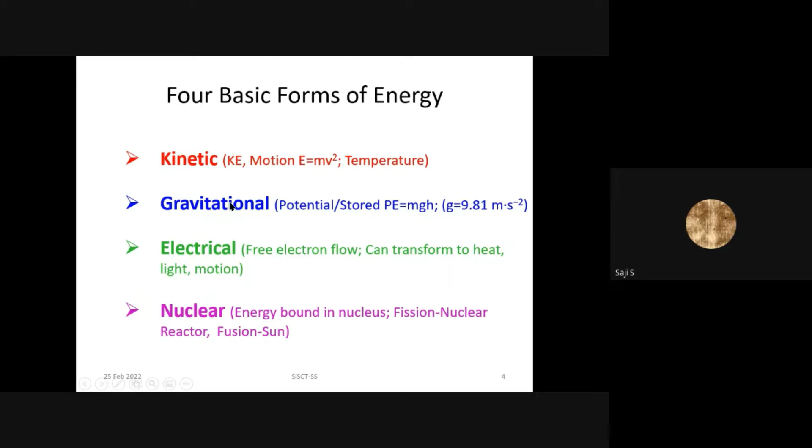So basically, we are looking at 4 types of basic forms of energy. And out of this, the major classifications are two: non-renewable energy source and renewable energy source. The non-renewable energy source is exhaustible, meaning it is finite, and is polluting, and the byproducts are also difficult to handle. Typical examples are coal-based, petroleum, nuclear, and gas-based sources. These are non-renewable energy sources. Now, renewable energy sources are regenerative, meaning they can be regenerated. They are non-depleting, they don't deplete. They are environmentally benign, which means it's a low carbon technology and very safe to use, because the handling of byproducts is very minimal here. So there are many examples of this.

One is solar photovoltaics, which is a direct conversion of sunlight to electricity. You have solar thermal, where the sun's rays are used to heat up a medium like water, thermal conversion. Wind, of course, is due to pressure variations in the atmosphere, and biomass. Geothermal is the latent heat, intrinsic heat in the Earth's crust, which can be tapped by injecting water into the depth of the Earth and taking out the hot water or steam. We have tidal waves because of the gravitational pull of the moon. We have waves because of variations in temperature and wind patterns. Of course, for hydro we consider only small hydro as a renewable source.

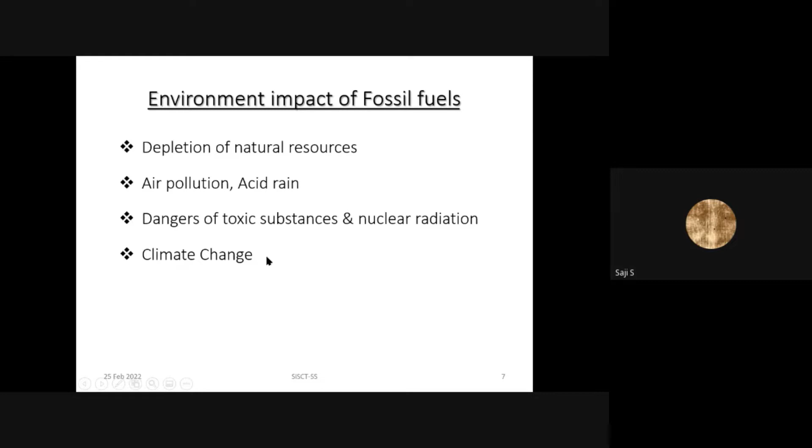And finally, climate change. Climate change is something I'll go into more detail on, because it's an interesting topic. Now we have a term known as greenhouse effect. It's a very natural process. There is nothing abnormal about it. It's a process by which the Earth's temperature is balanced by the atmosphere.

There's a natural layer of carbon dioxide and water vapor in the atmosphere, a natural background level, which prevents the heat of the earth from going out. The sun's radiation comes incident on the earth, the Earth gets heated up, and re-irradiates some of this heat backwards into the atmosphere, but this layer protects or prevents much of the heat from going out.

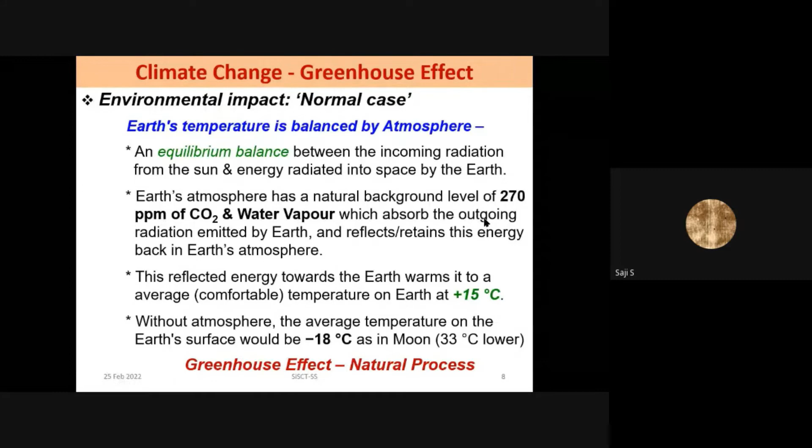The result is that Earth is maintained at a very comfortable temperature of about 15 degrees centigrade. This is the average temperature of the Earth. If this level of CO2 and water vapor were not there, the average temperature would be like that of the moon, where it is minus 18 degrees centigrade. So this is a natural process - greenhouse effect is a natural process by which carbon dioxide and water vapor prevents the Earth from getting too cold. It's maintained at a very comfortable temperature.

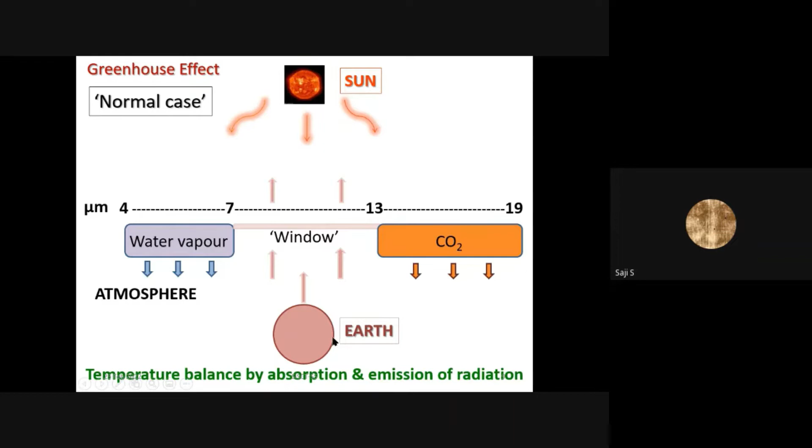Now alternatively, if there are a lot of greenhouse gases like methane, ozone, carbon dioxide etc., they block the outgoing heat from the Earth, so it is reflected back to the Earth, and this causes an increase in temperature of the Earth. Greenhouse gases originate from fossil fuels, burning agricultural waste, chlorofluorocarbons (like refrigerants), and so on. So excessive production of greenhouse gases can cause this temperature retention in Earth.

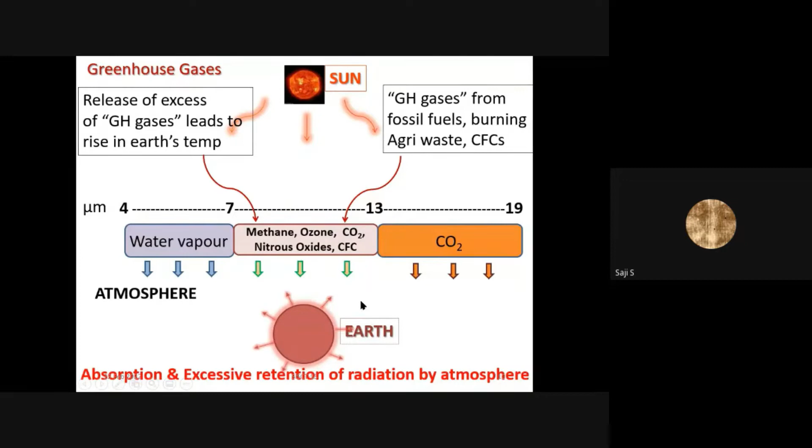Carbon dioxide is one of the major contributors, which is a byproduct of burning fossil fuels. Methane gas is from agricultural activities. Nitrous oxide is from agricultural activities and fertilizer uses. And fluorinated gases are also a contributor. So all these are majorly produced by fossil fuels and industrial processes.

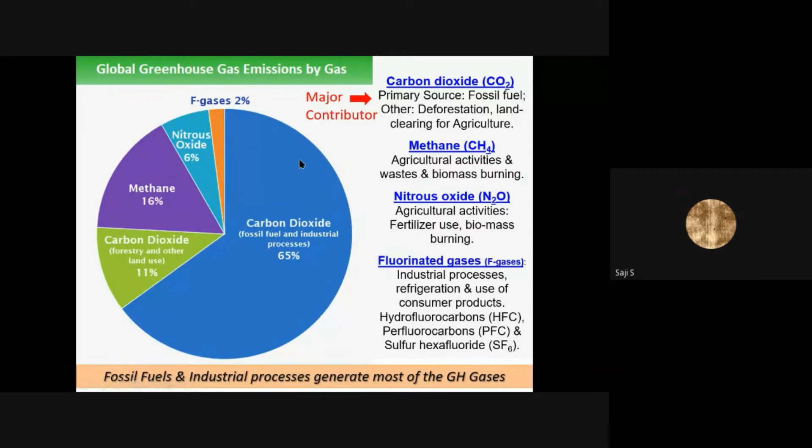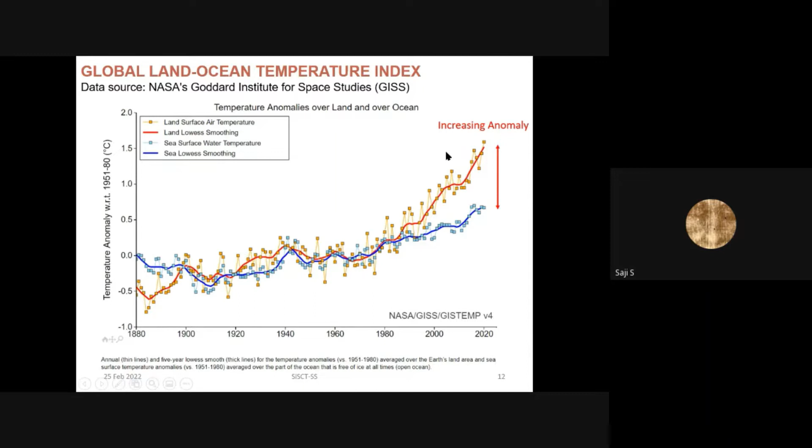The net effect is a temperature difference between the surface water temperature and that of the land. This is becoming an anomaly now, and the gap is increasing, which means there's a heating up of the Earth over a period of time by about 1.5 to 2 degrees centigrade. It's very small, but the effect is visible, it is discernible. This is known as climate change, and it gives rise to abnormal floods, high temperatures, heavy tornadoes, or whatever. Any changes in geographical patterns could be due to such increase in temperature.

Now we also look at what is carbon footprint. The carbon footprint is defined in terms of global warming potential in units of gram carbon dioxide equivalent per kilowatt-hour, per unit of electricity that is produced. It is known as global warming potential, and this is documented for different energy technologies.

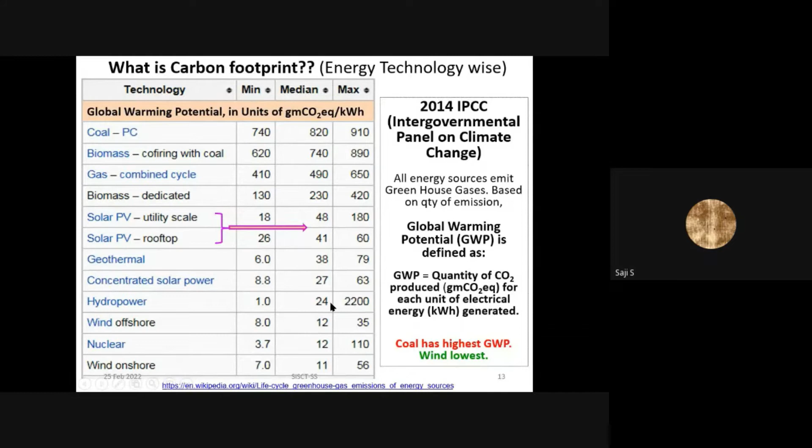For coal it is the highest, 820 gram carbon dioxide equivalent per unit of electricity produced, whereas for wind it is the lowest, at 11. Photovoltaics or solar energy is somewhere in between, quite less, at 41 and 48. So the global warming potential index is highest for coal and lowest for wind, and this value can be used to calculate the amount of carbon dioxide that's produced.

So in our normal lives, we come across many of these energy materials like electricity. Suppose we use 150 units of electricity per month - it gives rise to about 1.5 tons of carbon dioxide every year.

This is obtained from certain standard emission factors. If you use petrol, 15 liters of petrol gives a carbon dioxide output of about 0.413 tons. Diesel is about 0.318, and liquid petroleum gas, our cooking gas, is about 0.25 tons. The lowest comes when we use solar energy for electricity generation, only about 0.053, almost one order of magnitude less than liquid petroleum gas, diesel, or petrol. So this is the advantage, a low carbon footprint for solar energy.

So the basic driver, the key driver for renewable energy, is to switch and utilize low carbon technology sources, renewables. So this is our motivation.

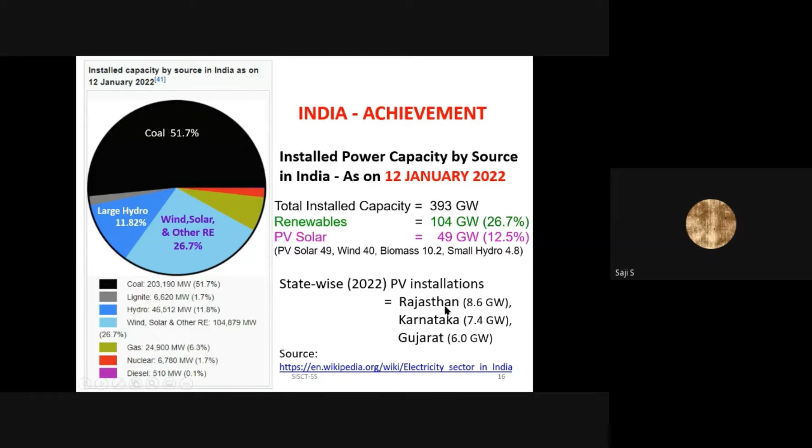In India, as of 12th January 2022, out of a total installed capacity of all energy sources of 393 gigawatts, 104 has been from renewables. Renewables means wind, solar, and mostly wind and solar, but of course small hydro; geothermal is not present in the country. Small hydro and biomass together account for about 26% of the total installed capacity. PV solar, at 49 gigawatts installed capacity, is about 12.5%. It's not very large, but it is significantly large, about 12% of the total installed power capacity in the country is from solar. The leading states are Rajasthan, Karnataka, and Gujarat.

Now we'll look at solar energy briefly before we go into the technology. Sunlight is a very elegant source of energy, providing heat and light. It is abundant, universal, and distributed. It's sustainable, meaning it will last for the next generation also; we cannot entirely use it up, there's plenty for the next generation also. It's a low carbon technology, as we have just seen, and very benign. It's possible to directly convert sunlight to electricity by photovoltaics.

This is the technology we are going to look at, and it was enabled by the semiconductor revolution that has taken place in the world, basically silicon chips used in electronics. It's the basic PN junction technology used in photovoltaics, and there's a high compound annual growth rate for photovoltaics, almost 35%, which is significantly large.

It's easy to see that the amount of solar energy reaching the Earth in one year is almost double that of all non-renewable energy sources combined: coal, oil, natural gas, and uranium in the Earth. So there is plenty of energy reaching the Earth, and it can be tapped.

The sun is a very hot sphere of gas, and as said before, there's a nuclear reaction taking place inside. The temperature in the core is about 20 million degrees Kelvin, and the outside surface temperature is 6,000 degree Kelvin, also very large. The total power emitted by the sun is about 9.5 times 10 to the power 25 watts, again very large. The sun is, of course, a source of light, heat, wind, rain, vegetation, and life. So basically we have a single source, a non-depleting and excellent energy-producing source.

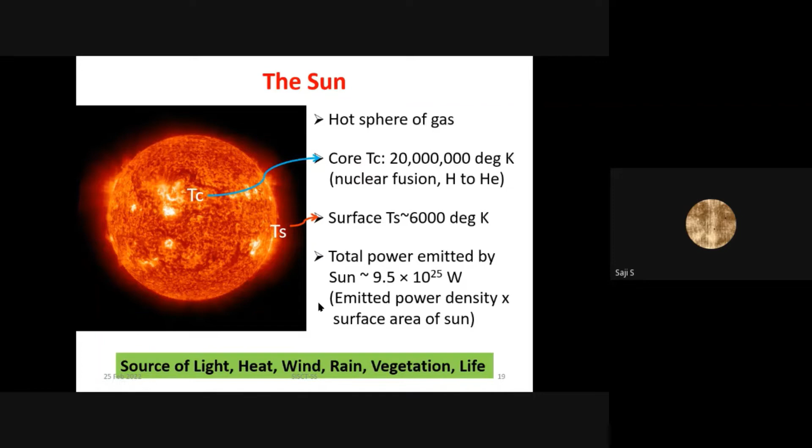Now the sun's energy comes to us in the form of a single white or yellow light to our eyes, but actually it contains different wavelengths. As science students, you will be able to see that there are different wavelengths; we call this the visible part of the spectrum. The electromagnetic spectrum extends from radio waves to gamma rays, and visible falls somewhere in the middle. If you pass the sun's rays through a glass prism or through water drops, you can see a number of split wavelengths. So we are going to use only these visible wavelengths.

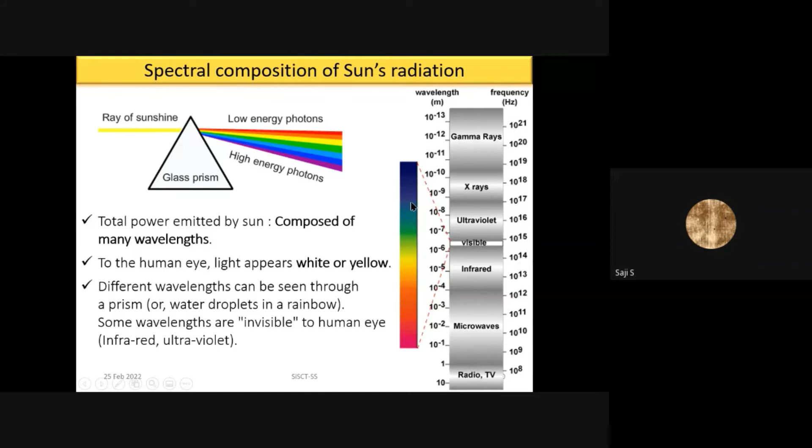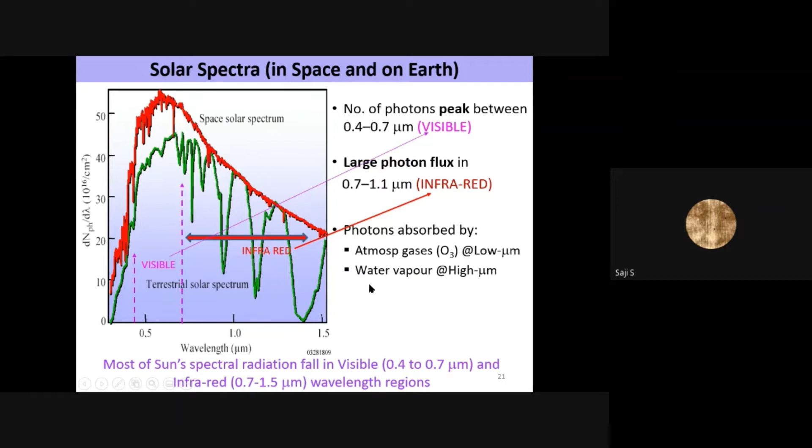We are going to find a material by which we will be able to use this. What reaches the Earth's surface and what is in space are slightly different, because the visible rays peak at about 0.5 microns, but there is also a large amount of infrared rays available in the sun's spectrum. What is in space is different from what is coming to the Earth, because there is a lot of absorption taking place in the atmosphere from ozone, water vapor, and so on. So what is really reaching the Earth is only about 70% of the sun's radiation.

Suppose the sun's radiation is 100. About 18% is absorbed by different materials like water vapor, clouds, or pollution, and also scattered. About 10% is scattered, so ultimately you get only 70%. But this is good enough, much more than enough, sufficient to meet all our needs, as we mentioned earlier.

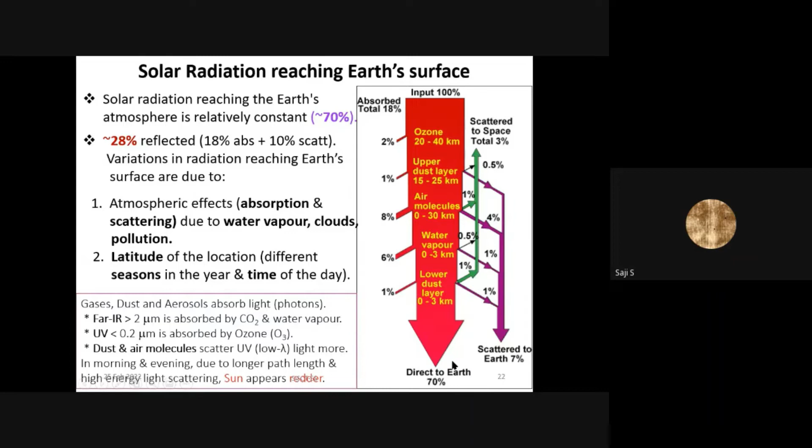Now, the intensity of the light, or solar irradiance, is measured in watts per meter squared. This varies with distance from the sun. For example, Mercury, which is closest to the sun at 57 into 10 power 6 kilometers, gets the maximum amount of sunlight, about 9116.4 watts per meter squared. Whereas Earth, which is farther away, gets only 1353, and Pluto, which is farthest, gets a very small amount of sunlight.

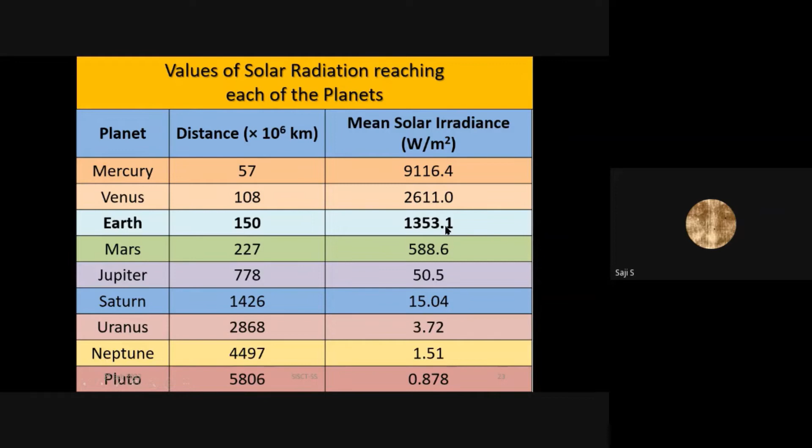But this is sufficiently large, as you will be able to see, to achieve enough solar installations. So this solar irradiance is about 1353 watts per meter squared. It's also known as air mass 0, and it's a standard solar spectrum for space solar cells. So if you use space solar cells, this is the amount of light that it receives.

Whereas if you use solar cells on the Earth, which is called terrestrial solar cells, you get only 1000 watts per meter squared, because the rest is scattered and absorbed. But this is a standard value of the sunlight that is reaching the Earth, 1000 watts per meter squared.

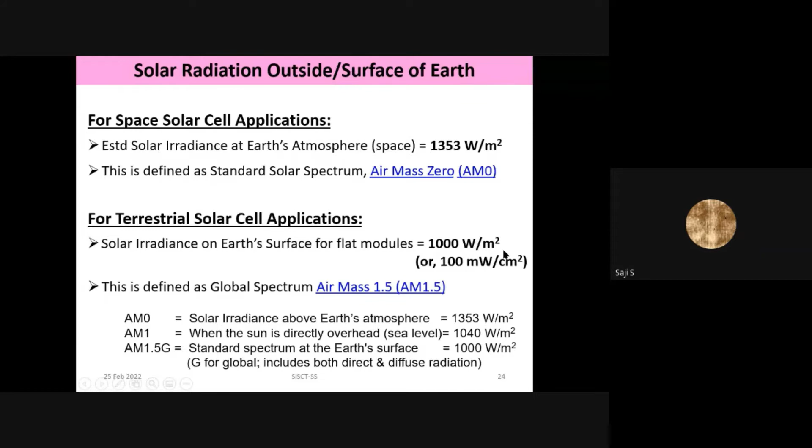So for the key atmospheric effects considered for photovoltaic applications, we have the spectral content of the incident light, which is 0.4 to 0.7 microns, in the visible range. The overall solar radiation, that is the radiant power density received by the Earth, is about 1000 watts per meter squared. This can vary.

If it's a rainy day, you don't get 1000 watts per meter squared. It will be much less. Or if it's a cloudy day, it will be much less. But this is a normal value of the radiant power density.

Then the tilt angle, the angle at which the photovoltaic module is tilted to receive sunlight, is also important. It's basically dependent on the latitude of the place. For example, the tilt angle for Thiruvananthapuram is about 8.48 degrees, whereas that of Bangalore is about 12.97. This means the photovoltaic module will be tilted at about 8.48 in Thiruvananthapuram, because it receives much more direct light, being closer to the equator than Bangalore, where the tilt angle is 12.97.

The local variations in the atmosphere also lead to different values of solar insolation. Solar insolation is the total solar energy received over a period of time, for example, kilowatt hour per meter squared per day. So for the entire day, you receive so much cumulative solar energy, and this is the energy that will be useful, because these solar cells have to work from morning to evening. So the maximum amount of solar insolation will help.

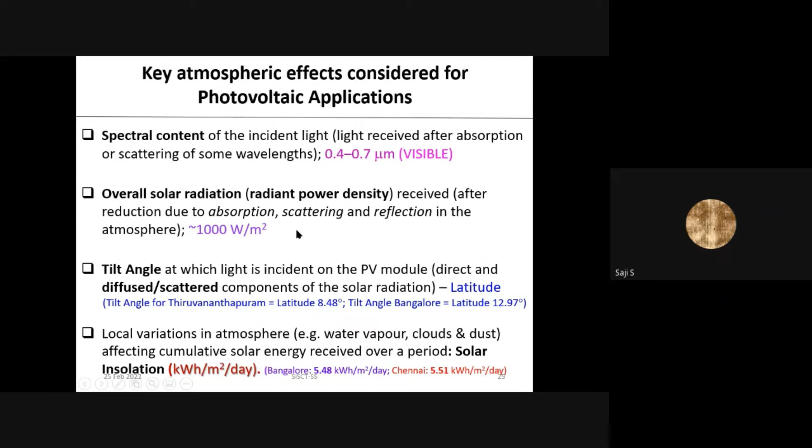So these are the four aspects of atmospheric effects which are favorable, which are useful for photovoltaic applications. We come now to materials. Materials are basically divided into three types: metals, insulators, and semiconductors.

Metals have the lowest resistivity. Semiconductors are in between. Semiconductors have a negative temperature coefficient of resistance, which means the number of carriers increases with temperature or doping. Whereas in metals, the mobility falls with temperature, so the resistivity increases with temperature. Just giving you some idea about metals and semiconductors.

So in semiconductors, electrical conductivity can be adjusted by doping. It has a negative temperature coefficient of resistance. Its band gap is small. Electrical properties are easily controllable. And semiconductors form the basis for all power devices like transistors, thyristors, etc.

Now, the band gap of a semiconductor is very small compared to that of an insulator. This is favorable because you can easily excite the electrons from the valence band to the conduction band. The band gap is the minimum energy required to excite this energy from the valence band to make it free. So this is very favorable for a semiconductor.

It's small, so it can be adjusted by doping or by giving energy like photons or thermal energy to excite and free these electrons, making it conducting. So basically, you are looking at semiconductors for this process.

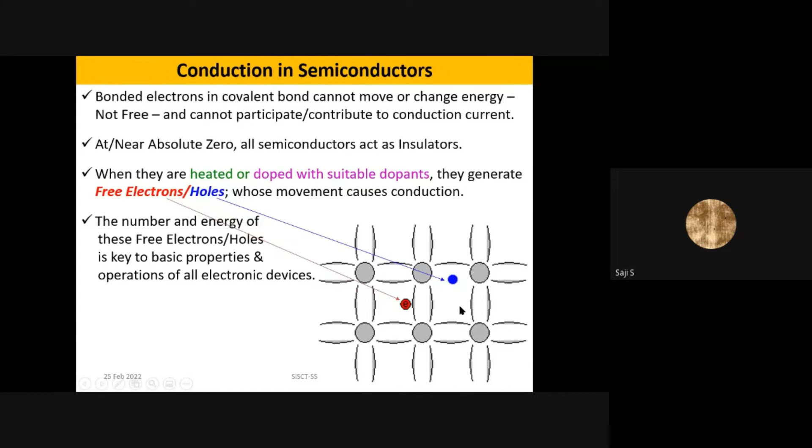So as I said before, if you provide an extra electron, like a phosphorus dopant, you dope silicon with phosphorus, you get an N-type semiconductor because you have an extra electron. After sharing the 4 covalent electrons of silicon with 4 electrons of phosphorus, phosphorus has got 1 extra electron, so that contributes to the electrical current.

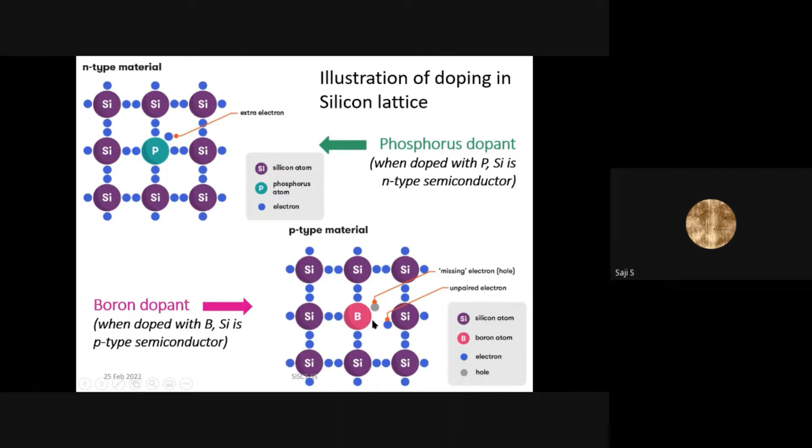Similarly, boron is a trivalent material with only 3 valence electrons, and the lack of an electron is known as a hole. So this hole provides for conduction as a p-type semiconductor. Now, if you combine two materials, you can get a p-n junction. A p-n junction is one where the carriers cross over and produce a built-in field, and this field will prevent further movement of carriers.

This p-n junction can be forward biased or reverse biased. If it is forward biased, it gives forward current like in a diode, and if it is reverse biased, it blocks the voltage. So that provides the key for all electronic devices.

So desirable properties of materials for solar cells are categorized into 4 major points. One is the band gap energy should be sufficient. The photon energy should be able to excite electrons through the band gap, which means the band gap should be between 1.1 and 1.7 eV for the visible spectrum. The ideal material for the solar spectrum is the material with a band gap of 1.49.

You should be able to make a p-n junction out of it, because you have to draw the current out of the p-n junction. The material should have a high absorption coefficient for light in the visible region. The raw material should be abundant. It should be available in a pure form, preferably as a crystalline material to avoid the defects. And the standard manufacturing technology should be easily adaptable, like a standard semiconductor device platform. So all these 5 conditions must be satisfied before we locate a material for solar cells.

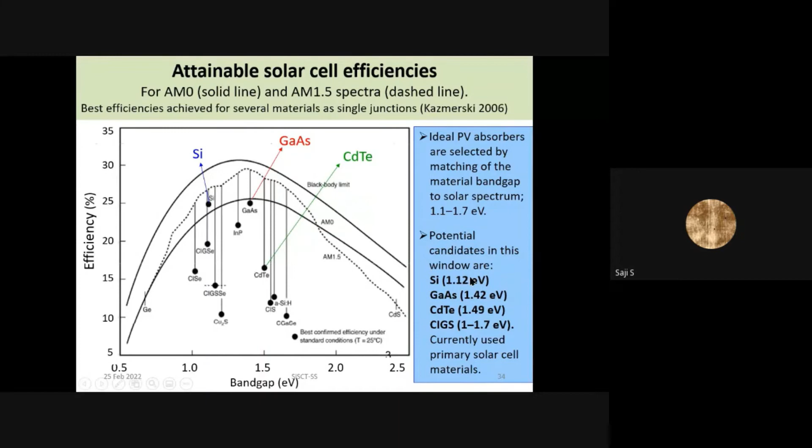Now let's look at the different materials. Between 1.1 and 1.7 band gap, we have different materials, out of which the ones that stand out are silicon, gallium arsenide, and cadmium telluride. All these have got favorable band gaps. So primarily all these materials are used in solar cells: silicon, gallium arsenide, cadmium telluride, and copper indium gallium selenide.

Now another requirement is it should be silicon. We choose silicon as a proven semiconductor material. Its properties are very controllable by doping. It has got an optimum band gap. It has got a high absorption coefficient. It's a stable material, and it's a universal choice because it's easily available in a crystalline form. So silicon is a very proven semiconductor material.

Silicon is also the second most abundant element in the Earth's crust. The most abundant element is, of course, oxygen, which is about 46.6%. The next is silicon, which is 27.7%. So availability is not a problem for silicon. It's plentifully available in the Earth's crust.

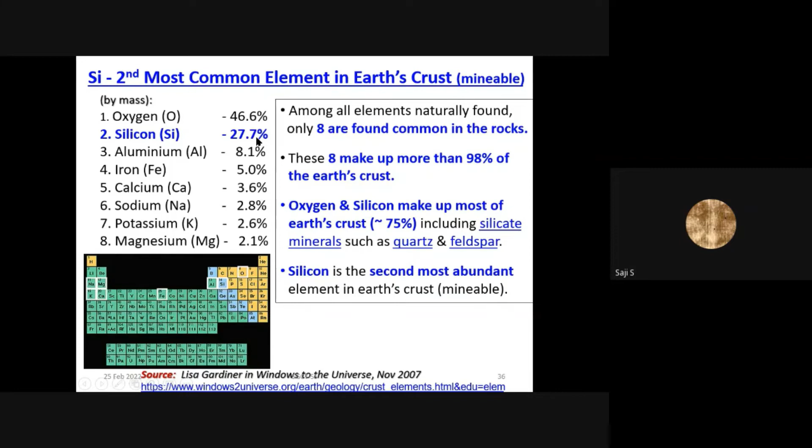Now, the depletion is not estimated for silicon. The amount of silicon available in the Earth's crust is so large that it cannot be depleted. Whereas coal is 100+ years and oil is only 50 years. That is, if you keep on drawing oil from the Earth, it can deplete in about 50 years. Coal maybe 100+ years, but silicon is available plenty. Its depletion period cannot be estimated. So all this leads to our favorite material for photovoltaics being silicon.

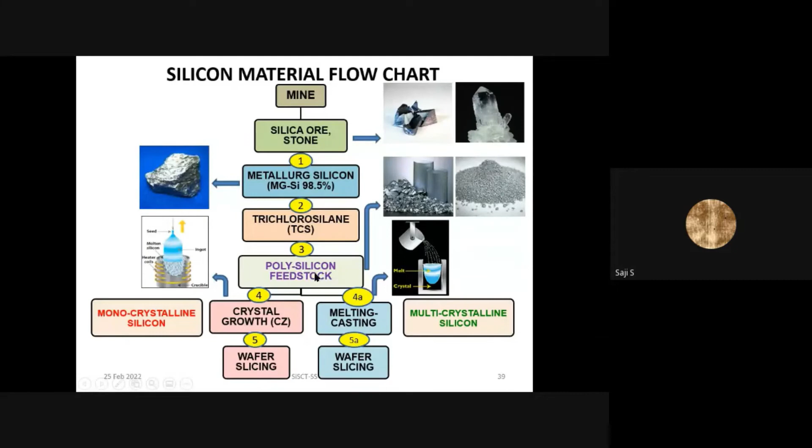So we'll quickly run through silicon's production aspects. It's an ore which is available in the Earth's crust. It's a stone; sand contains silicon, or quartzite contains silicon. It is converted into metallurgical grade silicon, and is then converted into a gas, trichlorosilane, to purify it. It's then reacted in a reactor to form polysilicon feedstock, from which crystals are drawn, and then it is sliced into wafers.

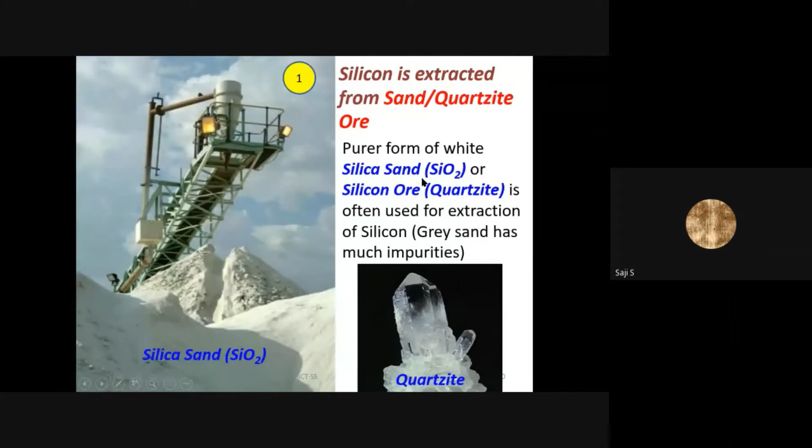So the first process is drawing the silicon ore, quartzite or silica sand, from the Earth's crust. This sand is reacted with carbon and you get metallurgical grade silicon. This is the first process.

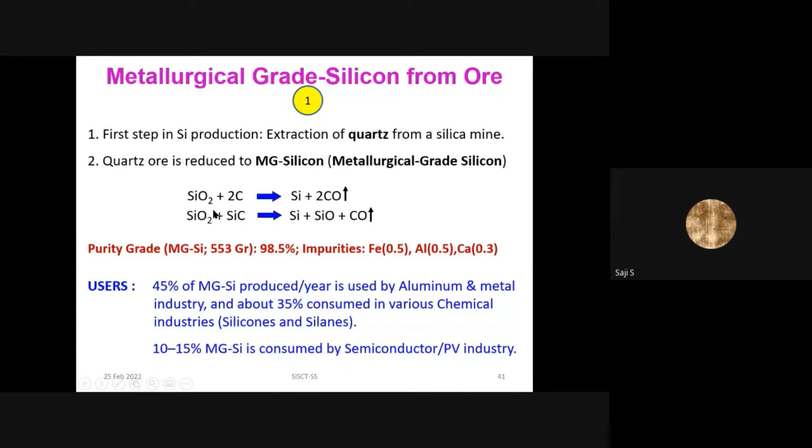This is done in a coke furnace, and this silicon is very impure, 98.5%. Most of it is used in aluminum and metal industries, and about 15% is used for the semiconductor industry. So basically, you get metallurgical grade silicon from the ore. The next process is conversion of this metallurgical grade silicon by reacting with HCl to form trichlorosilane. The idea is to purify this material in the form of a gas, and then you do fractional distillation of this, and you get a very, very pure form of this gas.

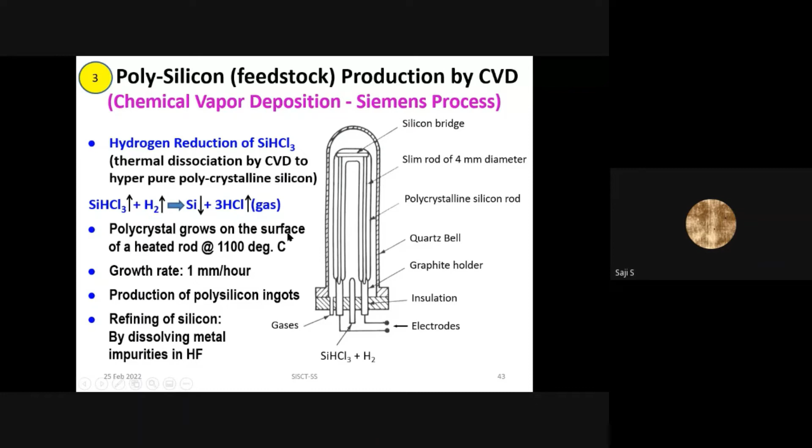The first process of monocrystalline crystal growth is the Czochralski method, wherein you heat this silicon feedstock in a crucible. You melt it, and then you put a seed crystal in the melt, slowly rotate it and lift it up. You get a monocrystalline silicon rod almost 2 meters long and about 8 inches in diameter.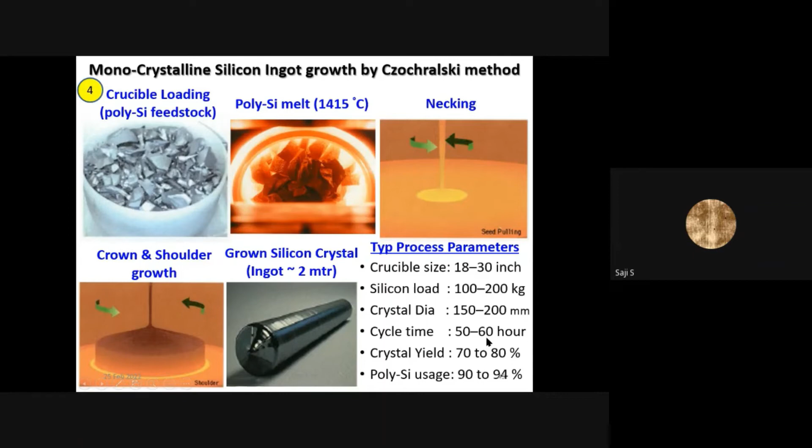It's a very slow process. It takes about 2 or 3 days to grow this kind of rod. But you can get such rods, almost 8 inches in diameter and 2 meters long. So this is a monocrystalline silicon rod grown by the Czochralski method. It's a standard process of growing single crystal materials.

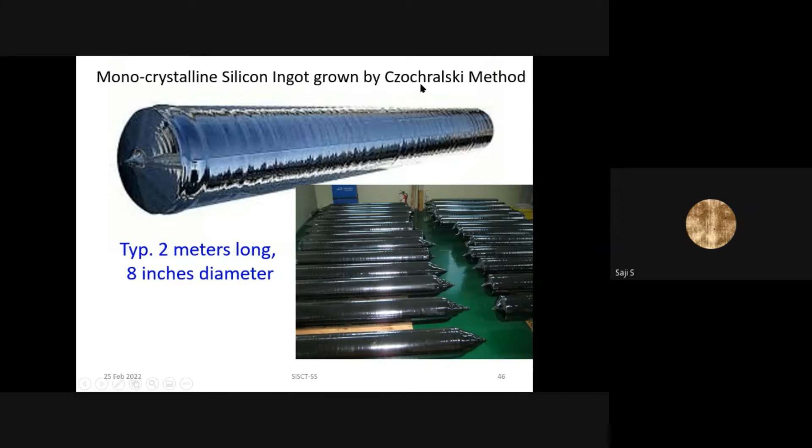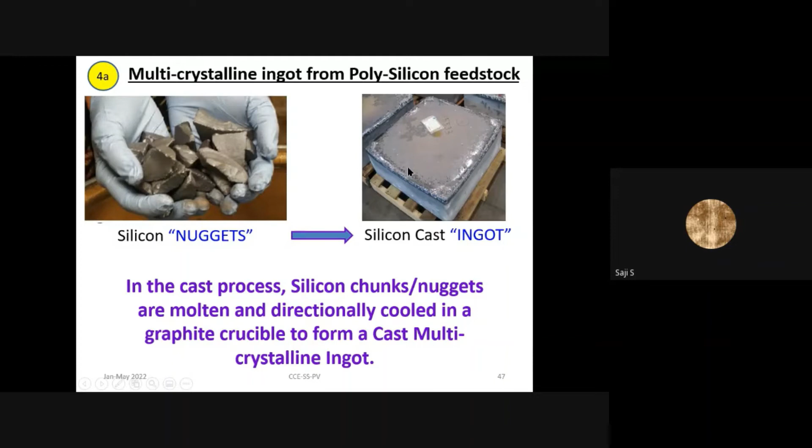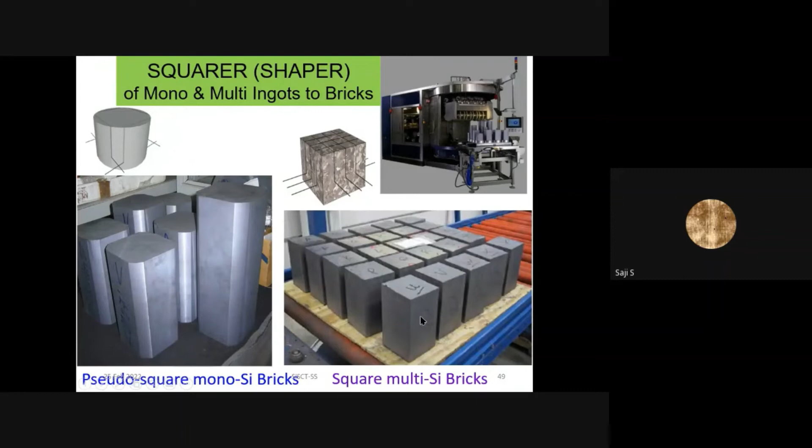Similarly, it can be grown into a multicrystalline ingot by directionally solidifying the molten polysilicon feedstock. So you get a large silicon cast ingot, which is known as a multi-silicon ingot. It's about 1,000 kg each, and this can be squared and cut into small bricks. Both monocrystalline and multicrystalline materials can be cut into bricks, and sawed into wafers.

There'll be a kerf loss from cutting because some of the material will be lost, but eventually by cutting you get a monocrystalline wafer or a multicrystalline square. This is a pseudo square and this is a square wafer. So these are the two types of silicon popularly used for photovoltaics.

Whereas in multicrystalline material, the order is very, very short range. You have different grains forming the crystal, and the boundaries are always broken atomic bonds. So the movement of carriers is not free. There'll be recombinations at the grain boundaries, and this can create long-term performance issues.

So the technology is always centered around single crystalline material, and the conversion efficiencies for solar cells are higher for monocrystalline wafers compared to multicrystalline wafers. Some statistics about a solar power plant and how much material is used: about 10 tons of polycrystalline feedstock can give rise to 2.5 lakh monocrystalline silicon wafers, and 2.5 lakh silicon wafers go into a 1 megawatt solar power plant.

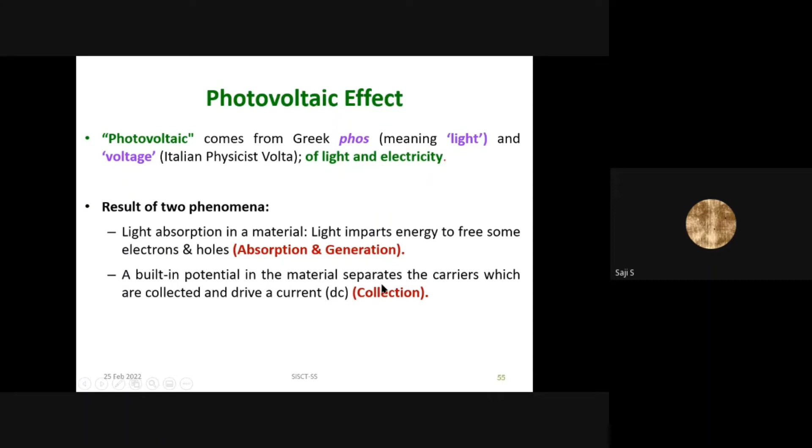It's the result of two phenomena. One is the absorption of light in a material and generation of electron-hole pairs. The second process is the built-in potential in the p-n junction separating the two carriers, electrons and holes, and they are collected in an external circuit. So basically two phenomena: absorption and generation, and collection.

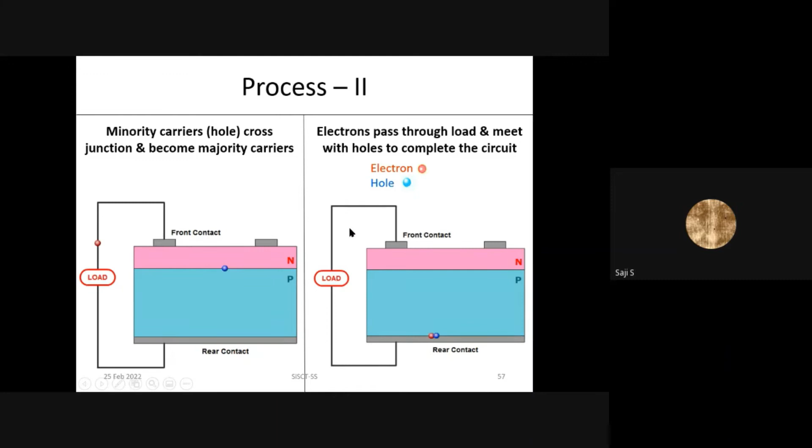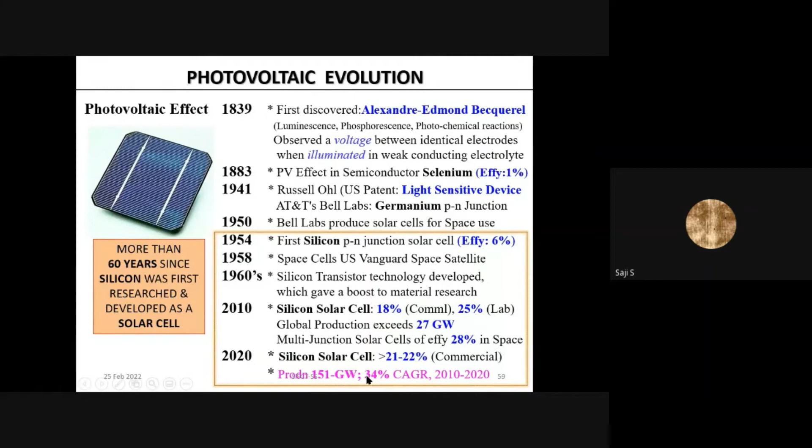Now the evolution of the photovoltaics: it was first discovered in 1839 by Becquerel, but that was only a photovoltage that he observed. But eventually in the 1950s, Bell Labs produced these space solar cells. The silicon cells were produced in 1954 with an efficiency of 6%. And eventually, the current day commercial solar cells are, of course, 21 to 22%. So there's a significant development since the 1950s to reach this level. And last year, about 151 gigawatts of solar installation took place in the world, and it's a very, very proven technology at the moment.

The conversion efficiency can be calculated from its open circuit voltage, the voltage output of a solar cell, which is about 0.6 volts, and short circuit current, which is about 9 amps. So if you multiply this, you get the output of a solar cell, which is about 4.89 watts for one single solar cell. So a solar cell of size 156 by 156 mm squared can produce 4.89 watts. And the incident power of the sunlight on this area is about 24.3 watts.

So the output divided by incident power gives the efficiency of the cell, from Pmax. Pmax is 4.89 divided by 24.3 into 100 gives 20.13%. So this solar cell efficiency is roughly about 20%. Each solar cell can give a voltage output of 0.6 volts. And the current depends on the area of the cell, and in this case, it's about 9.2 amperes.

Now, the crystalline solar cell, we will just briefly describe its structure. It has got a p-type layer as the base layer, p-type silicon layer, which is a boron-doped silicon wafer. It can be either mono or multicrystalline wafer, on which an n-type region is deposited. That is, the phosphorus layer is diffused at about 900 degrees centigrade, and over which an anti-reflection coating layer is deposited, which is silicon nitride coating.

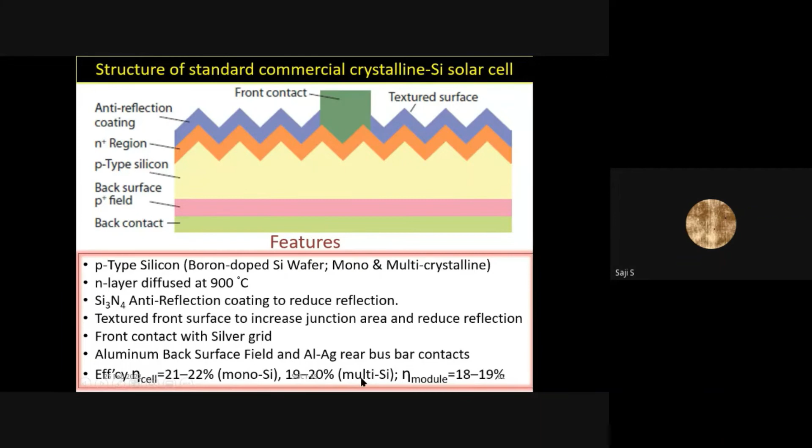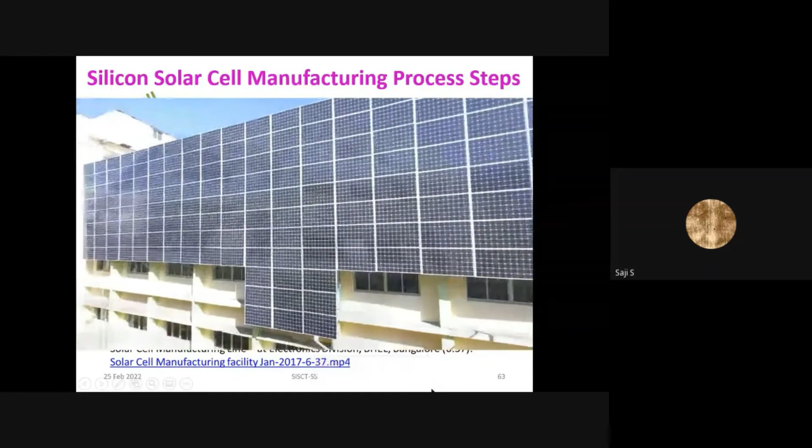So I don't know if I'll be able to run this properly. I'll just try to run a 6-minute video. Please let me know if you are able to hear this. Are you able to hear this? Are you able to hear this? Yes, sir. We are able to hear. Okay, good. Sir, now the audio is mute, I think. It's mute, is it? Are you able to see here?

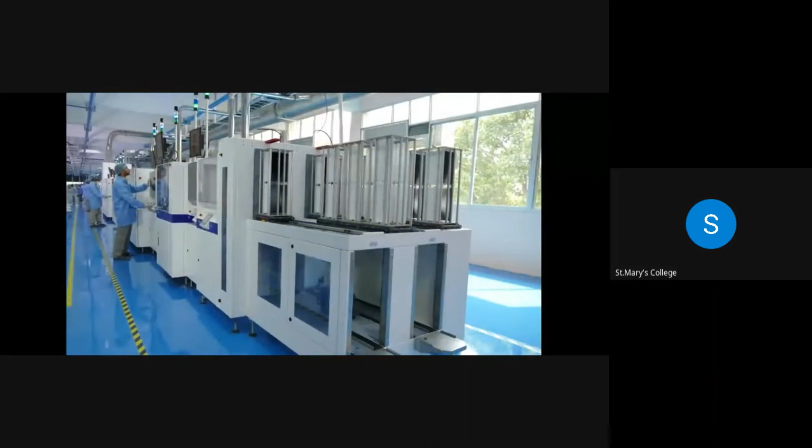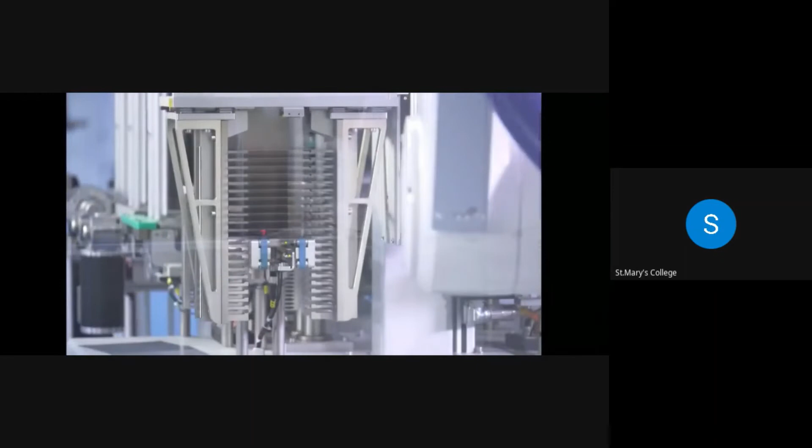BHEL's Electronics Division in Bangalore is a pioneer in the solar photovoltaic area in India, with more than 3 decades of experience and dedicated in-house R&D expertise. As part of the Make in India initiative of the Government of India, a state-of-the-art multi-crystalline solar cell manufacturing facility has been established in the electronics division in a record time of 12 months. This manufacturing facility is one among the most advanced and sophisticated facilities in the country, with robotics-based automation for wafer handling. Advanced features to ensure reliability, quality, and safety of process operation are integrated in this facility.

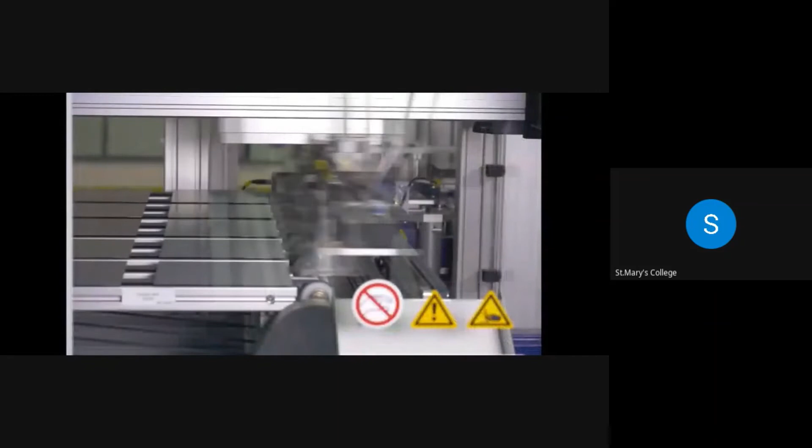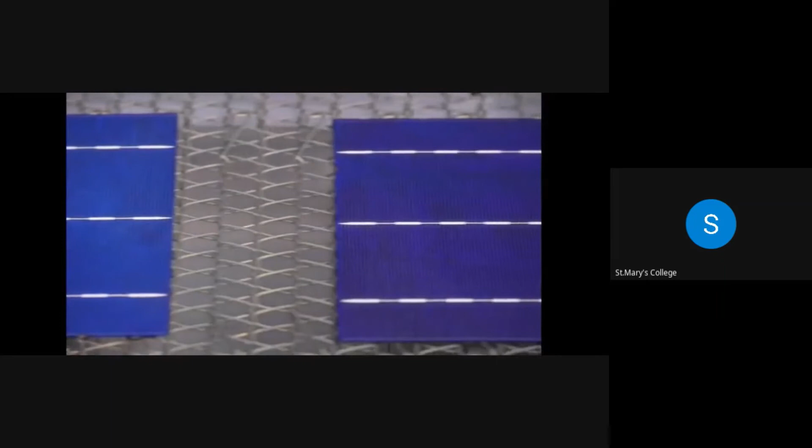This line has a capability to process multicrystalline wafers at a throughput of 3,000 solar cells per hour. Targeted power output of multicrystalline cell from this line is 4.38 watts per cell with a conversion efficiency of 18%. Major process steps of this line are inline acidic texturization, low pressure diffusion, inline phosphorus silicate glass removal and back junction isolation, anti-reflection coating, metallization and solar cell testing and sorting.

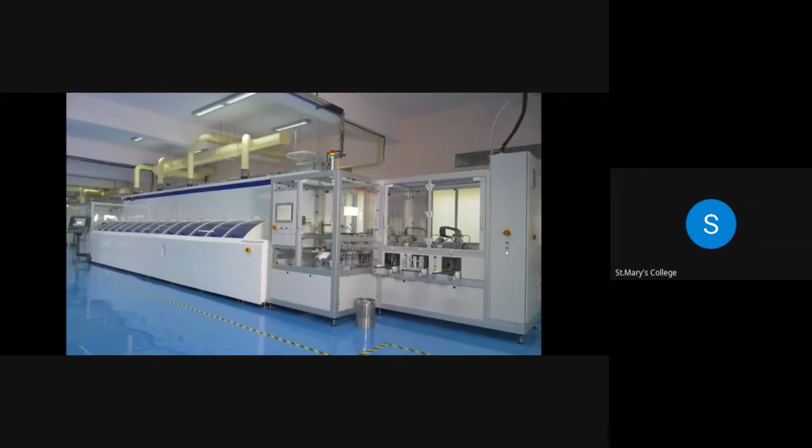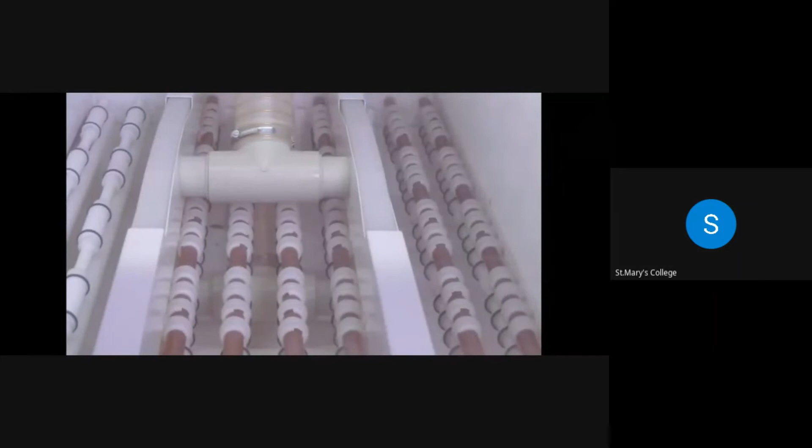Inline acidic texturization station. Incoming wafers are unpacked and loaded as coin stack into wafer carriers, which are part of the loader. Automatic wafer loader picks the wafer from the carrier and places it on the transport conveyor, which transports them into texturization equipment in 5 parallel lanes. Wafers pass through process chemical baths inside the acidic texturization process, where isotropic etching with acid mixture is carried out. This process increases surface area of the wafer, facilitating reducing reflection of incident sunlight, which is critical for efficient utilization of sunlight. After texturization process, wafers are dried and loaded into wafer carrier by automatic unloader.

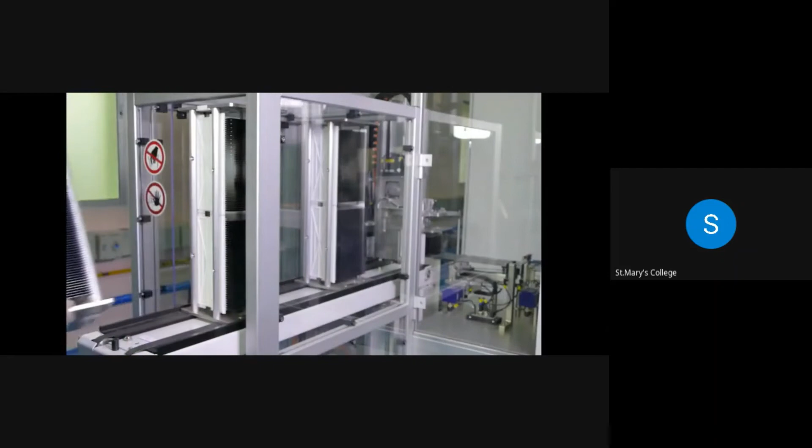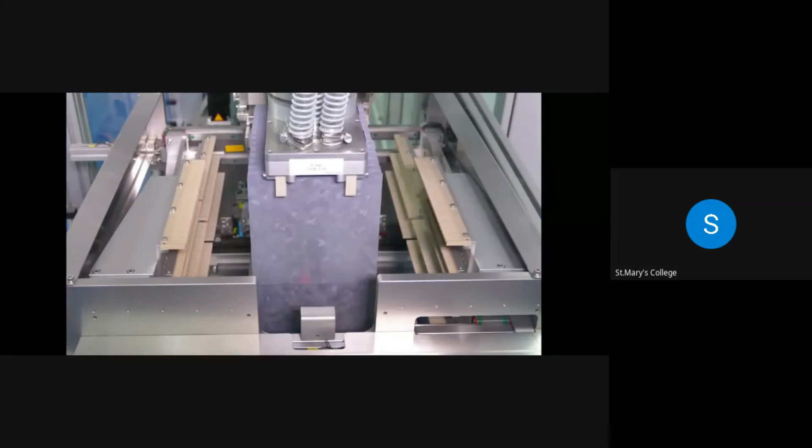Low pressure thermal diffusion. Wafer carriers from the previous process are carried in a trolley and loaded into the wafer handler of the diffusion furnace. A robotic arm picks up wafers from the cassettes and places them on a quartz boat in back-to-back configuration.

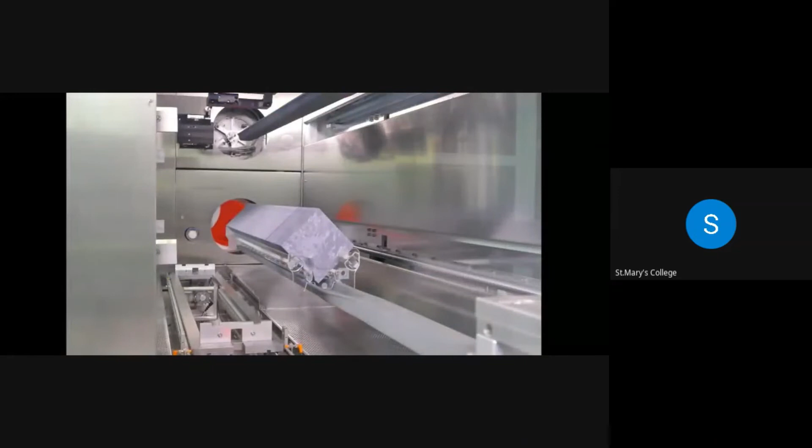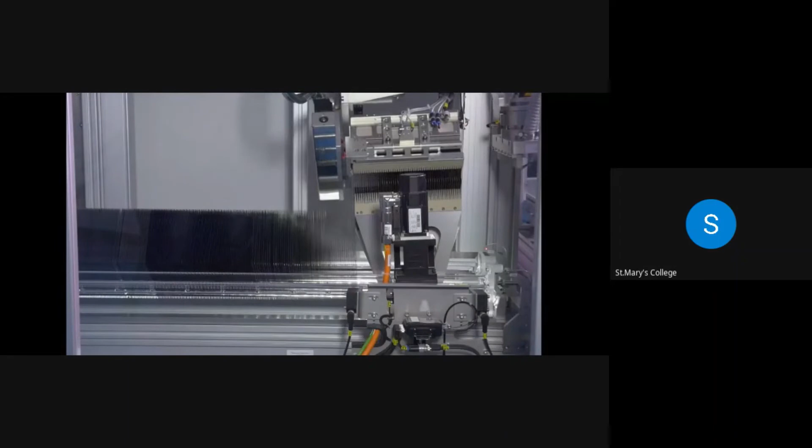The quartz boat with wafers is loaded into the furnace, where the diffusion process takes place under low pressure using phosphorus oxychloride. In this process, a P-N junction is formed by thermal diffusion in a low pressure environment. On completion, wafers are loaded back from the quartz boat into wafer cassettes by the robotic system.

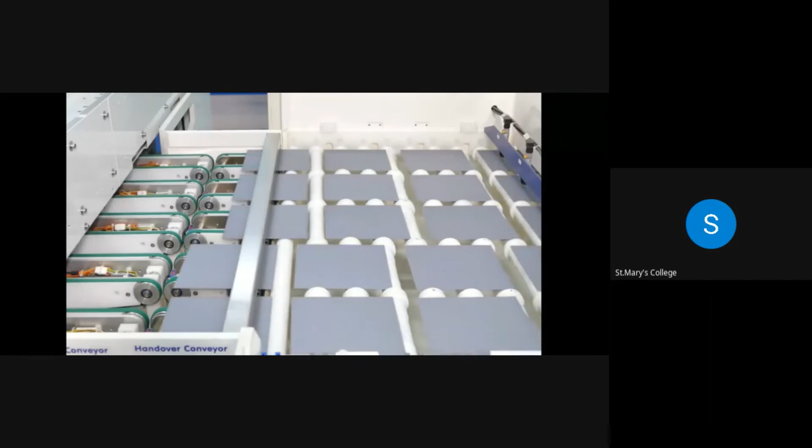PSG removal and back junction isolation. Wafers are transported through process chemical and rinse baths, where PSG removal and back junction isolation is carried out by chemical etching, which improves the shunt characteristics considerably over the earlier plasma etching process.

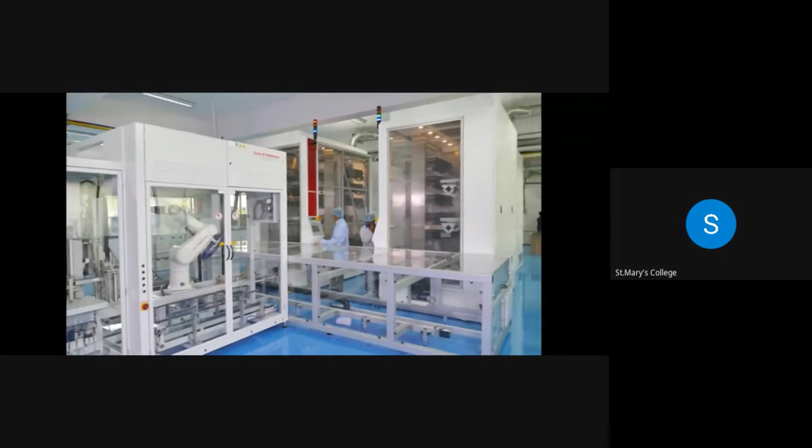PECVD, or anti-reflection coating. This process considerably reduces reflection of incident light and improves light absorption, thereby increasing solar cell efficiency. Wafer cassettes are loaded into a robotic system which picks up wafers from the cassettes and loads them into a graphite process boat. The graphite boat is transported into the PECVD or AR coating furnace.

A thin film of silicon nitride coating with anti-reflection properties is deposited on the wafers in a vacuum, plasma and high temperature environment.

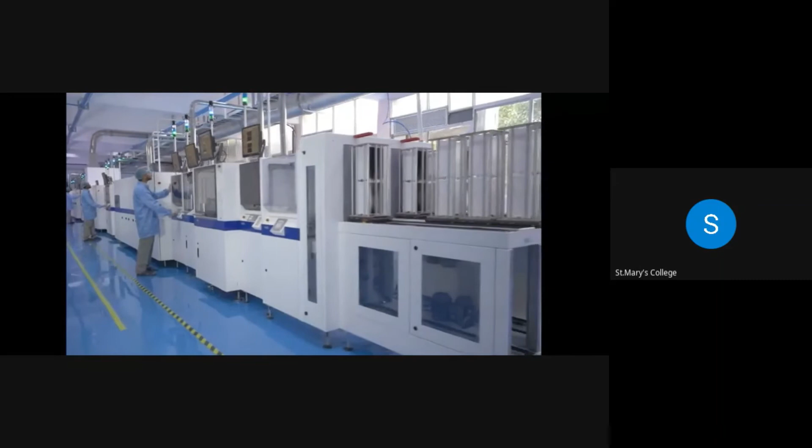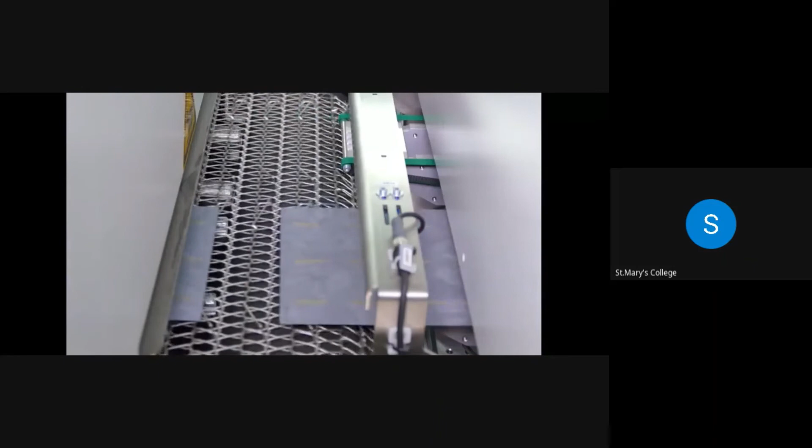Metallization line. The metallization line consists of 4 printers, 3 dryers and 1 contact firing furnace. Front and back contacts are printed on the wafer surface in screen printing machines. The front contact pattern is printed using silver paste, and the back contact area is printed with aluminium and silver paste for bus bars. CCD cameras are used for wafer position detection and alignment.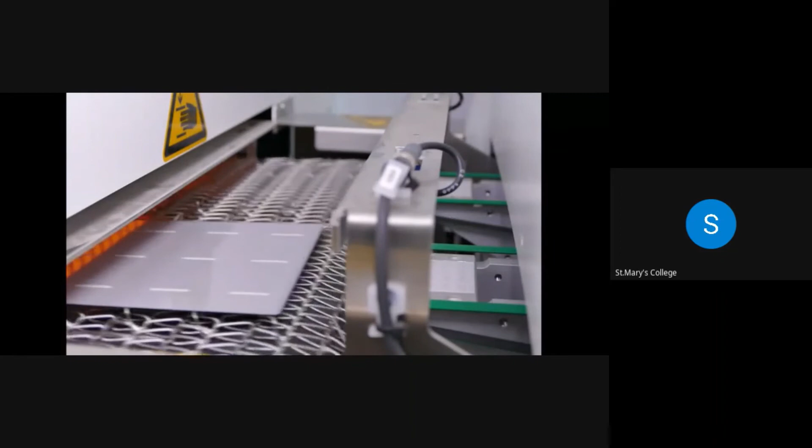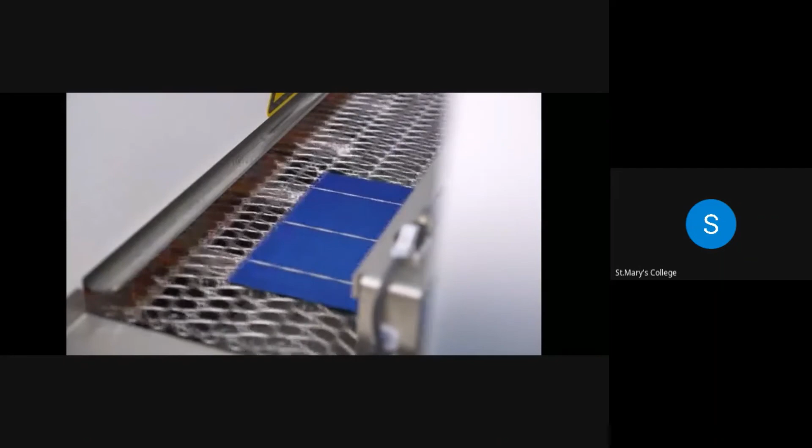Separate printers for front grid lines and bus bars ensure high aspect ratio screen printing and hence higher efficiency. Screen printed wafers are dried and sintered in an infrared belt contact firing furnace, where a sharp temperature profile is maintained to ensure contact adhesion. Finished solar cells come out of the firing furnace.

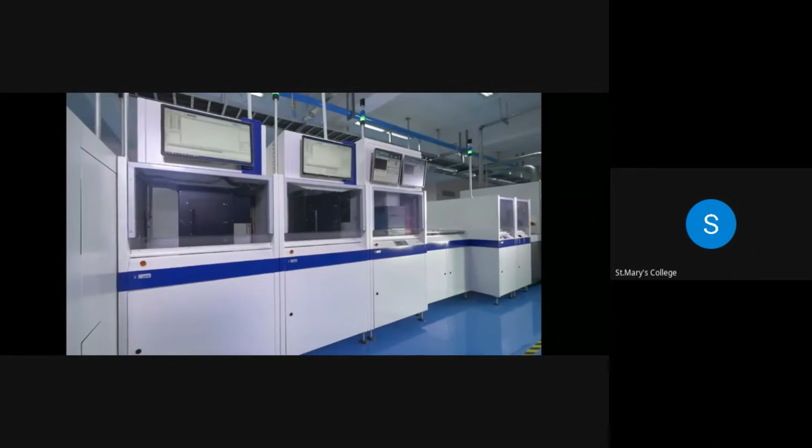Tester and sorter. Solar cells are tested and sorted in an automatic tester sorter. Solar cells are tested for electrical characteristics like open circuit voltage, short circuit current, power output, fill factor, efficiency, etc., and sorted according to power output narrow bands and loaded into pre-assigned bins for the respective power output.

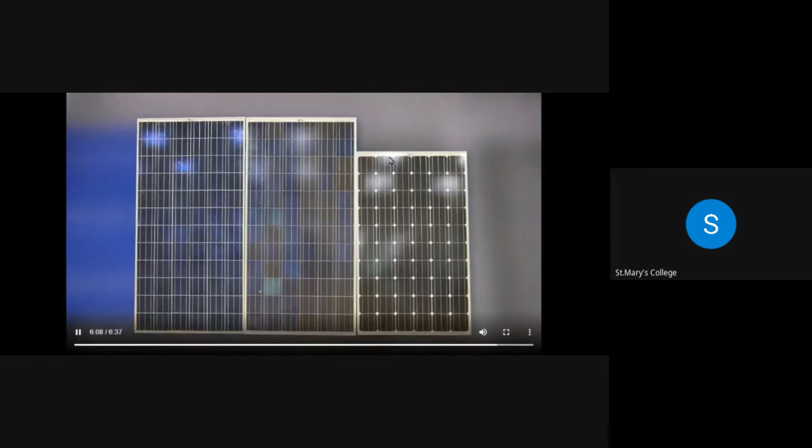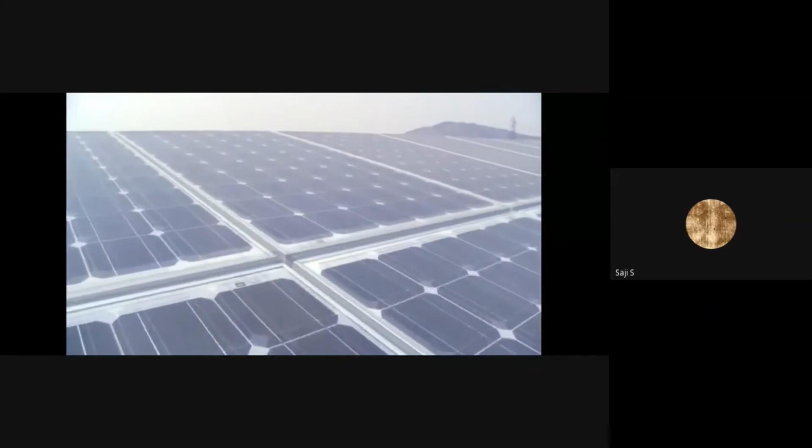The solar cells produced in this line will be used for manufacture of high-efficiency photovoltaic modules of power output up to 320 watts using 72 numbers of solar cells. The modules shall be used in grid interactive solar power plants for energy generation all over the country. BHEL is ready for the future with its ultra-modern solar cell line.

Sorry, we'll just go back to that.

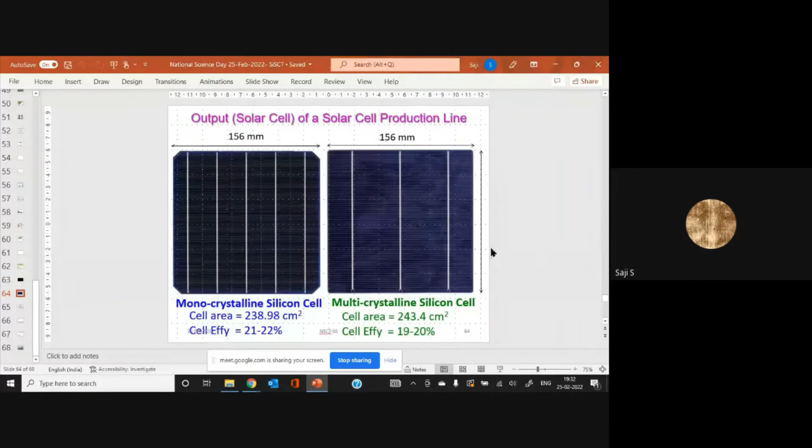So can you hear me? Yes, sir. Yeah. Yes, yes.

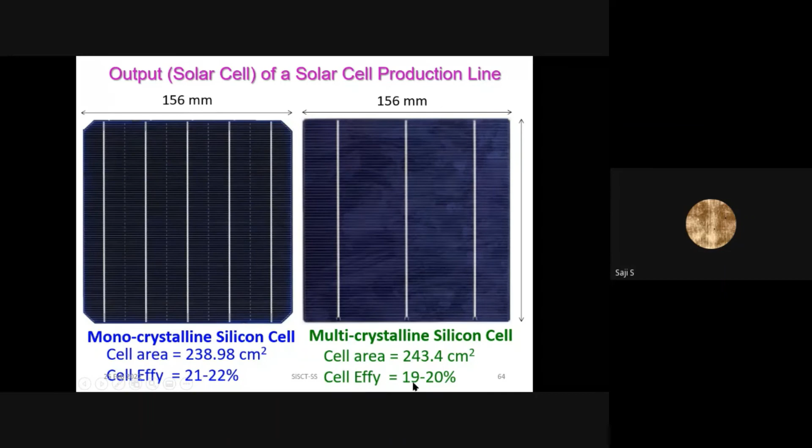So this is the output of the solar cell manufacturing line, which produces either a monocrystalline solar cell or a multicrystalline solar cell — not both from the same line. The monocrystalline solar cell, as I said, has a higher efficiency of 21 to 22%. Multicrystalline is slightly less because of the grain boundaries, 19 to 20%.

The global share of silicon technology is about 95% of all solar cells. Monocrystalline has 80% and multicrystalline 15%. Whereas thin film solar cells like cadmium telluride, cadmium sulfide, copper indium gallium selenide, amorphous silicon, etc., have only 5% in all, which means the major technology is still remaining with silicon at the moment.

Spacecraft use multi-junction solar cells, made from a different material. These are used in very, very small amounts in spacecraft, but have very high efficiencies.

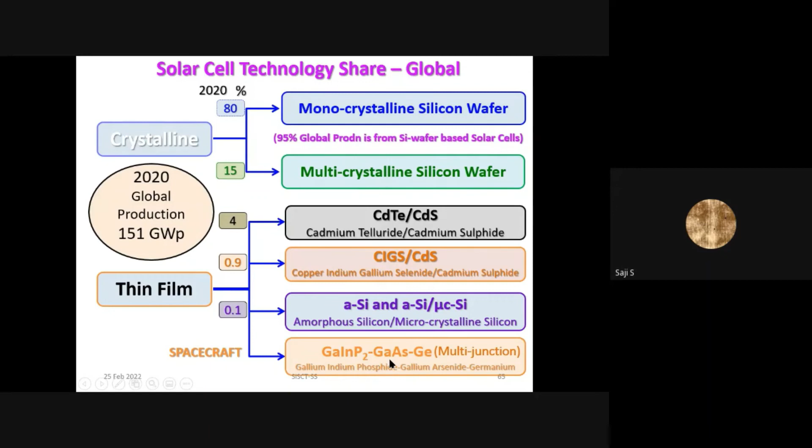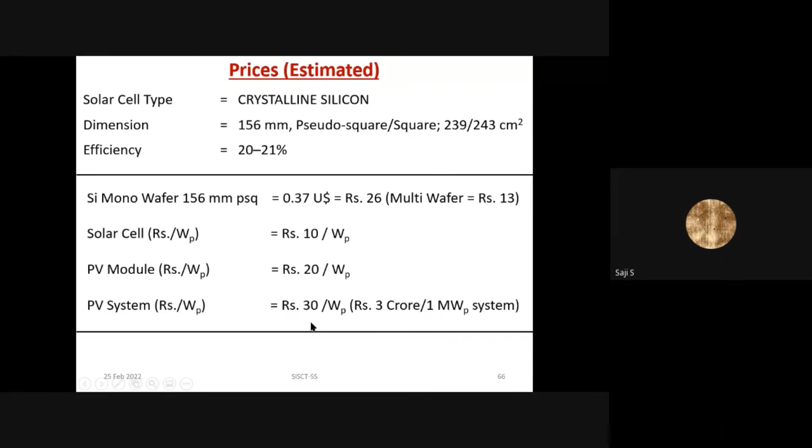So finally, crystalline silicon technology is a very mature and proven technology. It has a field reliability of over 25 years, which means it is time-tested for such a long period, so one can safely use it. The guarantees are also for 25 years.

For the modules, technology partners and equipment vendors are easily accessible, meaning there are plenty of equipment partners. If you want to start a manufacturing unit, you can easily get equipment vendors. Raw materials are available universally, plenty available. Although not available in the country, it's mostly imported from China. But there are industries in the country now starting to put up silicon wafer manufacturing units.

Its cost-to-efficiency ratio is likely to improve, meaning efficiency is continuously increasing and cost is coming down, so this ratio is likely to improve. The cell technology has about 95% global market share, so it's a very, very proven and commercialized technology, widely used in large ground-mounted utility power plants and rooftops. So this is a very, very commercial product.

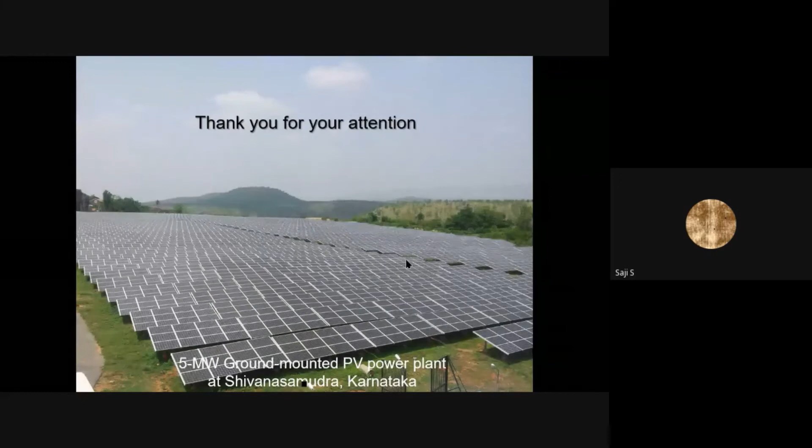And that completes our presentation. Thank you for your attention. So if there are any questions, I'd like to answer them, and you can give me feedback.